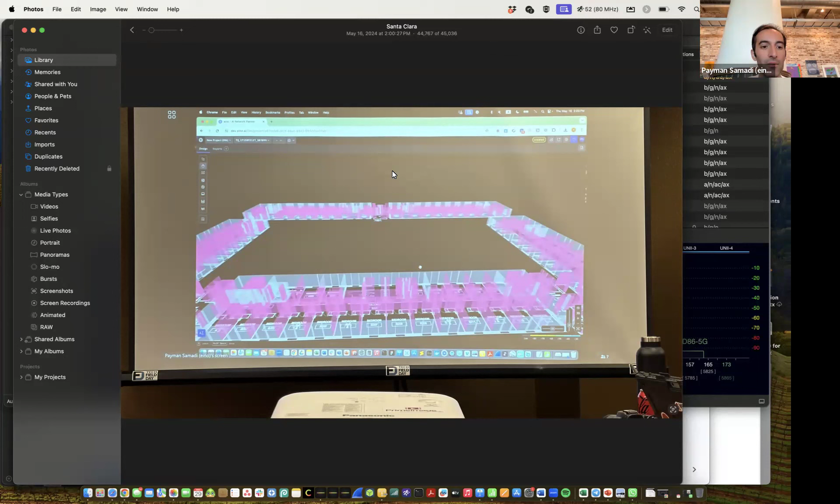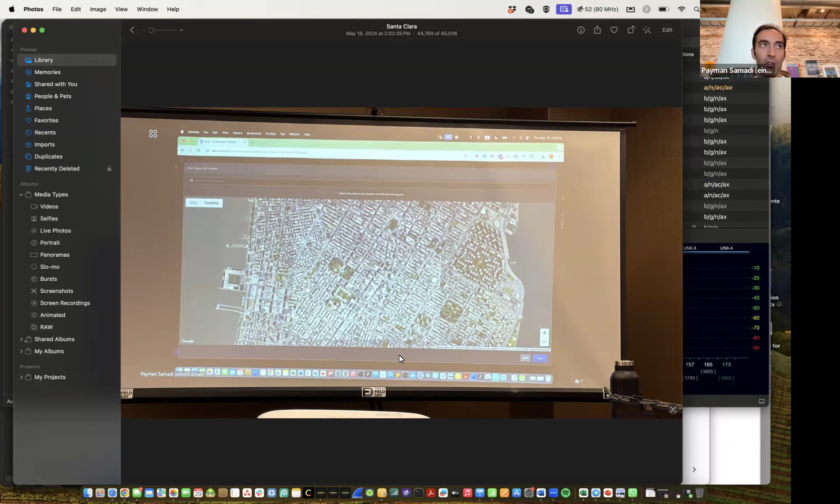So there are tools in the market that have been around for many years, and they're all great tools because there are thousands and thousands of networks built using them. But there are some differences. When we look at iBwave, it's a very sophisticated tool that requires deep expertise to use, and it's mainly built for carrier-level design of cellular networks. But once we come to private cellular networks, it's a different concept — the cost structure is different, the number of radios you put is different, the way you design the network is different. So there are different requirements that we thought we could put into our platform.

In terms of Wi-Fi design as well, we realized there are ways to introduce automation and create a recommendation engine that helps people save time, providing a rough order of magnitude as your very first initial design when you haven't won the project yet and don't want to spend much money. You can very fast create that rough order of magnitude, then tune and do detailed design, avoiding much of the manual work, and go all the way to the validation side. So I think that's how we are different — we try to build the product to fit private cellular and Wi-Fi, making things faster and easier for people. And faster and easier is what we all need.

And I think now, with the presence of more players in the field of Wi-Fi design, this comes at a perfect timing, because there are a lot of organizations out there that are either not renewing services with existing providers, or they're just new to it and want to explore all the different options available.

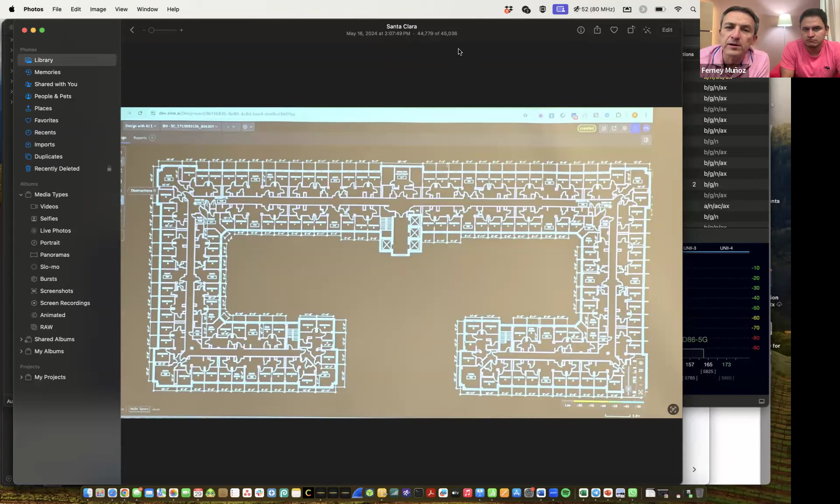Do you have a chance to share your screen and show us how the tool works a little bit? Let me just stop sharing my still boring pictures that aren't very clear, and then I'll let you show your product so our audience can see for themselves.

So we are a web-based platform, so you're able to basically design on web. You don't need to install, and that provides a couple of things: you're able to easily log in anywhere that you are. You're also able to basically share and work on projects together on the different phases and make sure that everything's online. So that makes this process much easier.

But I'll go through the process of creating the project. So when you create a new project, you could create an indoor project, you could create an outdoor project, and you could create a project through your own clutter data, so the terrain data and the DSM data that you have. I'll show you an example of how you could create a project in each of these workflows, and feel free to stop me, ask questions, if anyone comes.

Oh, I will, I will. So, we're good at doing that, interrupting whoever's presenting.

Certainly. So on the outdoor project, the most important thing is about the environment that you're building the network. Anywhere that you build a network, the most important thing is where you build the network, and having correct and accurate information about that area makes a big difference. And whether it's indoor or outdoor, you kind of need to create that scene.

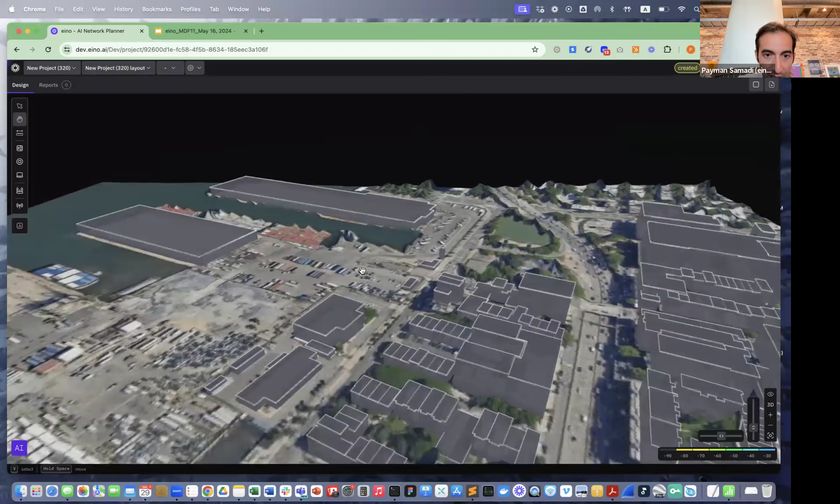So you see in these areas that I defined, we have these buildings, and they have different heights there. If you kind of go further, you see that there's different heights for trees here. So it has recognized and created that surface for these trees in different locations.

Can you modify some of this or add your own? Yes, you're able to modify. So this is the building - the assumption is that there's a concrete wall there and it has a specific thickness, a specific height, but you're able to change that and basically say, okay, this is not 35, this is 10 centimeters.

And boom, it's done. Or for example, you come here and say, oh, I have a lot of containers here that I did not basically put there. What if I go and draw one of those there and say this is a metal container, it's 2 millimeters thick, that's usually what it is, and it's 6 meters high.

I can draw this here, and easily select it, copy, paste it, and add it to different locations. I can multi-select and copy, doing all these manipulations on these files and modify it the way I want. That's the first phase that helps create those environments much faster, if it's outdoor.

And if it's an indoor setup, you're able to go and... wait, before you move away from that, can we go back to that one? Sure, sure.

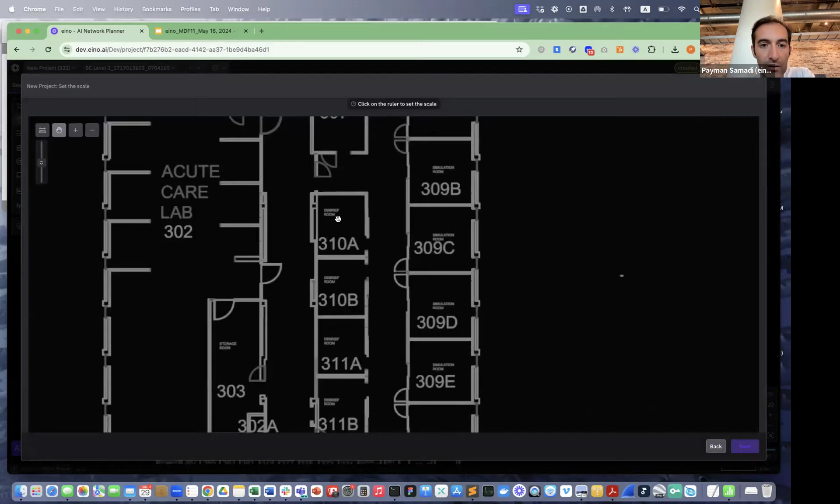For example, this is the PDF file that I've uploaded there. And two things that we ask you to do when you upload the layout to help in the automation side. One side of it is basically setting the scale of the project. Usually there's some sort of information of the scale. Here, there's nothing there, but I could just look at the wall and understand that, okay, my wall's 1 meter on this project. I've measured it and I know what it is. And then the second side, we basically ask you to tell us where you want to build this network.

And based on that, our calculations in terms of calculating the coverage area, but also doing some of the automation and AI work, basically helps out here. Once you have a more clear area, you can definitely change it later on. But the first step is you have this kind of project layout uploaded on the platform here. And generally, you need to either find the layers and, based on that, put your walls there or draw the walls. We have different wall types and materials you're able to put there.

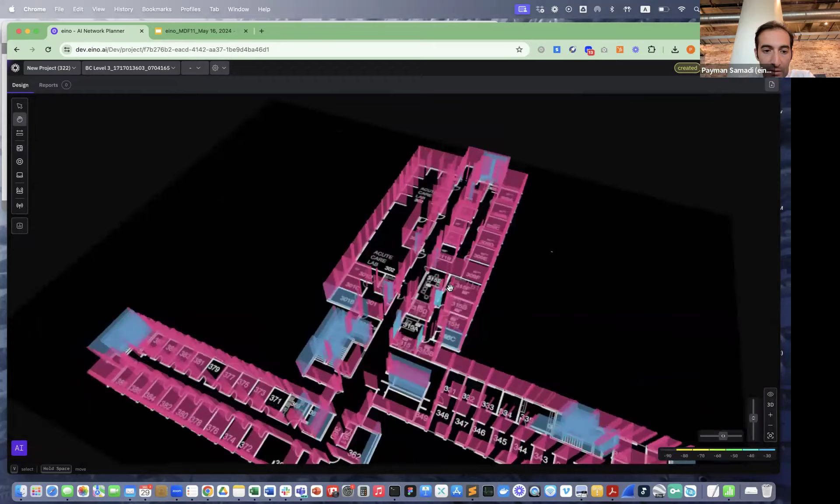But one thing we have implemented is this generate walls feature that analyzes this image, and based on how it's been drawn and how it looks, tries to automate that process and basically finds those walls and everything for you. So if I go to 3D, it has been able to recognize all the locations of the walls there, and the color coding is generally for the material used, and says, okay, these are the walls I found. This is the thickness of my walls, this is their material, and this is the height of my walls. So you kind of have your thing there.

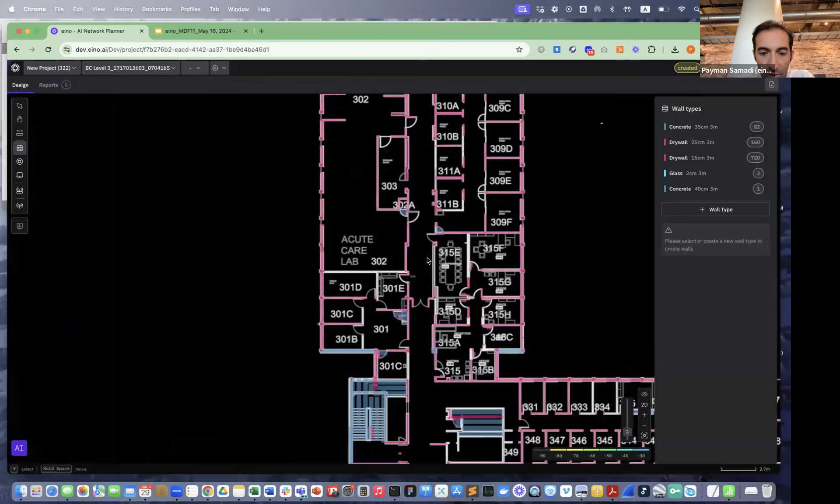It might not be 100% accurate. For example, here it has recognized these stairs as walls, but you could basically just select and delete them and get these fixed. But it saves you a lot of time, especially at the start, when you want to just get your initial rough order of magnitude.

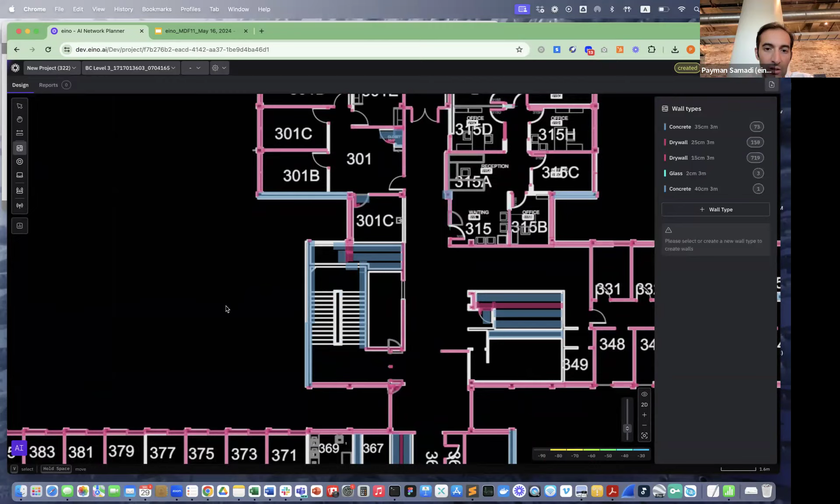You could say, you just have to go and shape it and get rid of little things or add little things that were missed. Exactly. And this is basically a model that's training, it's a learning model. So as we receive new layouts, we retrain and it becomes better and better as you go.

So this is like a non-layered PDF. It's just a flat PDF. That's basically an image, yeah. And it was able to do a pretty good job. It was a vector PDF, but no layering in it. It was just flat in that sense.

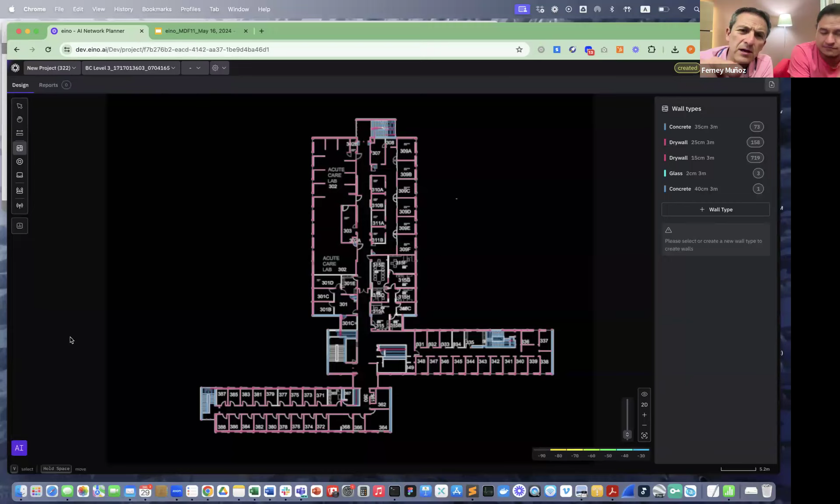And I'm glad to see that, like, if you zoom in on the text, it says acute care lab. I'm glad that none of those letters were detected as walls and simulated there. Yeah, usually that happens, but we train the model to make sure these things are not happening, and we do those correctly. Because that's happened many times, so we learn.

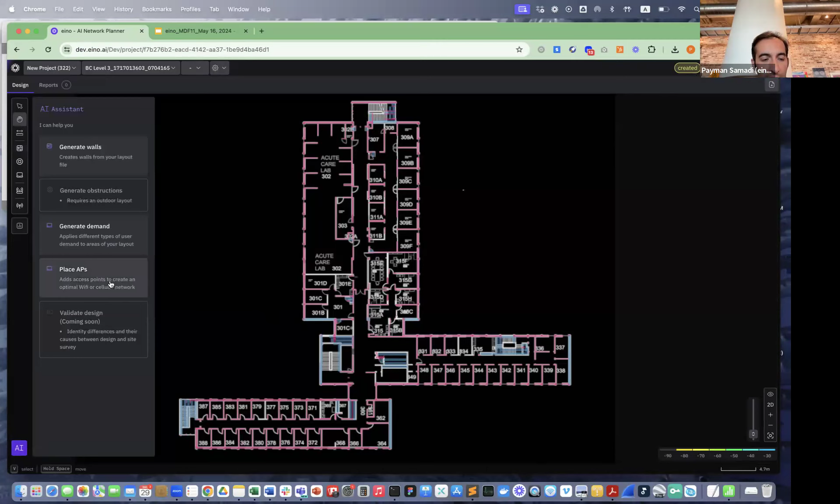So you go and clean up these areas, and then generally the first step of the design is to make sure there's enough coverage everywhere, and what's the number of APs we require here? And we have this thing called Place AP, and you're able to say, okay, I want to design with this AP, and I want to make sure at 5 gigahertz I have minimum minus 70, and that's my design criteria.

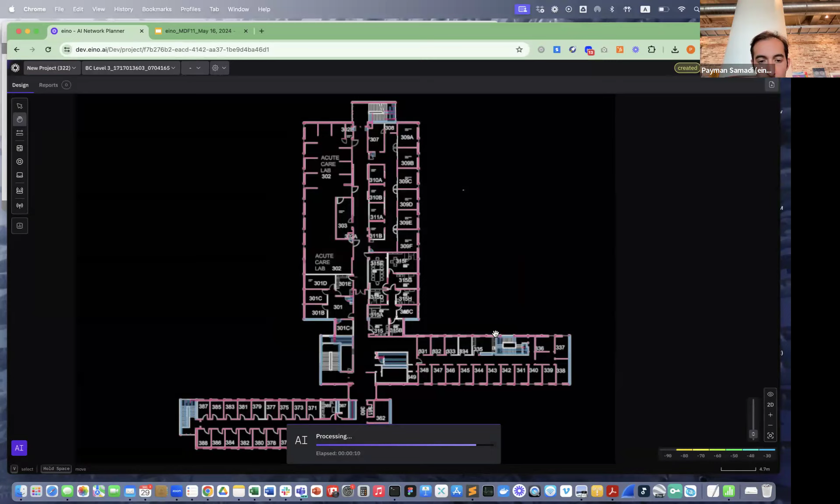And tell me how many APs I need, and what would be the best places to put my APs. So this optimization algorithm goes through your environment and understands the different types of walls, how signal propagates through them, and based on that, how many APs I need, where I need to put them, and what my heat map looks like. So that's kind of a general design that it gave you.

And we automatically generate the statistics, that you need about 22 APs here, and this is your bill of material. I can probably see some guys here cringing because it looks like it placed them all in the corridors, which we've had this argument before, like in hotels.

Like we are in a hotel in Valencia right now, and the APs are in the hallways, and hopefully I don't jinx it, but we're lucky we have good connectivity now because earlier today we were kind of experiencing that. Yes.

So, of course, I'm not saying that it's wrong. It's doing the best it can. And now the humans will come with the knowledge we have from real-life experience and perhaps modify this. As we relocate APs or manually add APs, is that also training the software to follow those patterns? Or how would that benefit the software? That's a great point. Yes.

There are many details in the design of the Wi-Fi that need to be considered. This is just the general side, but yes, do I put it in corridors? I cannot put it in corridors. I have to put it in rooms. I cannot put it in the rooms. My power levels, all these details. So on one side, we are getting a lot of feedback on these features, and we are making changes so you could say, these are the different types of areas I have, I want to make sure no AP goes to the corridor.

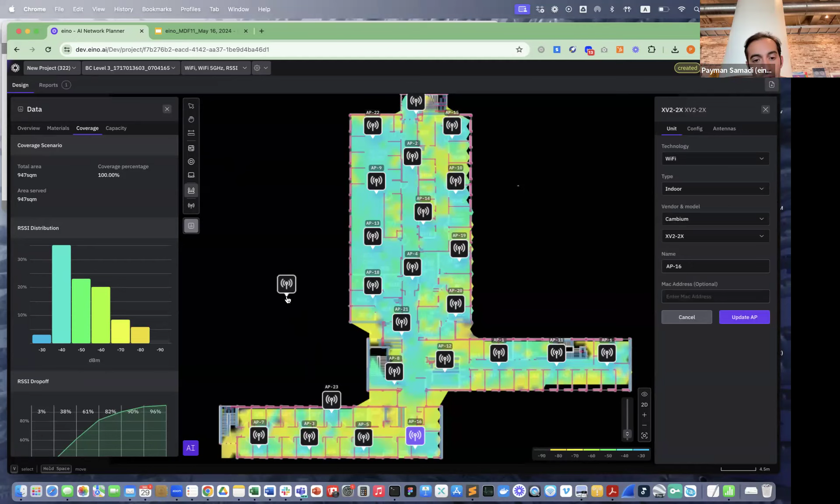Can you just look at the coverage of one AP if you select one? Yeah, that's something we're adding by the end of the week. We realize it's very important for you guys to do that. Yes, that's something you're adding. And then, as you said, you could just go and say, okay, now I need to add one here. So now I'm good there. And I could see my stats are improved. Okay, perfect. Wow, pretty exciting for all those out there designing Wi-Fi.

Now, part of the design sometimes is going on site and measuring and double checking and corroborating losses and attenuation and stuff. Do you have a device that you use to go on site and measure, or to validate and compare the simulation versus the actual measurements on site? Sure. So it's a bit different for indoor and outdoor.

For outdoor, we have created a standard schema so that you're able to export site survey data if it has any sort of lat-long information. So if you go and collect with any device that has lat-long and you're able to export, you can export that data and see it on our platform. And I'll show you one example here. I think this is an example, I might be wrong. This is not an example.

Yeah, and show it there. But if you're doing an indoor project, we don't have it yet, because indoor you need to have specific X and Y to be able to show it there. But we are talking to some partners to be able to work with them and provide that connectivity, so you could use some of the devices that you use, and then using those, you'd be able to import the data back and compare. Okay, perfect.

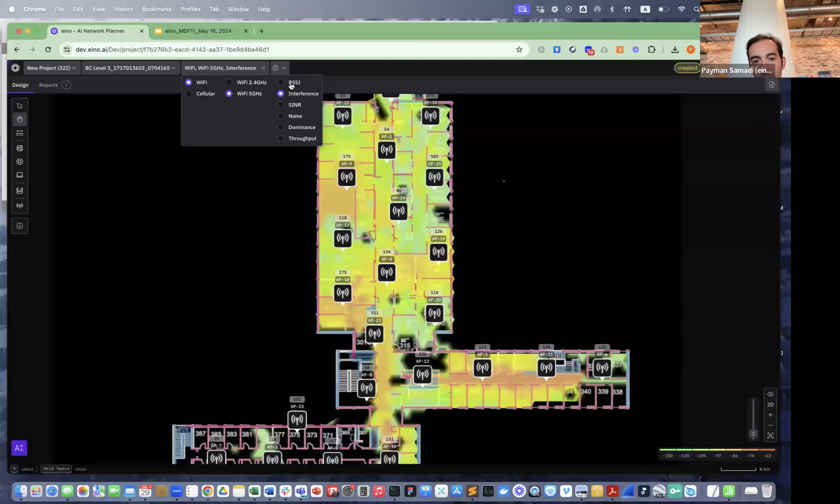And maybe a quick note at the end. I know in Wi-Fi, the most important thing is the channel assignment and interference that you get from the channels. So we do have an automated channel assignment where you're able to see all the channels assigned at different frequencies, and you're able to see the interference that happens there and compare and change and understand how it's working, your SINR and all that information there as well.

I'm seeing in your presentation, you're not including 6 gigahertz. Are you planning to add it? Sorry, what was the question? He was asking about 6 gigahertz. Yeah. The AP that was chosen here only supports 2.4 and 5. That's why it was restricted. But when you select an AP, if it's 6 gigahertz compatible, then that shows up as an option and you can see the coverage at 6 gigahertz. And all of the back end ray tracing calculations, the attenuations and the materials account for the differences in frequency. Okay. So this model specifically, this Cambium 23T, has 6 gigahertz, so it shows up there as well.

Okay. If you did a design with one model, can you swap all the APs in their locations to a different model and reapply everything? Yes, you could go here and basically apply that, and it changes the AP, and it shows you. I could go to RSSI, and then you're able to see everything there changed, and the difference between them, and you could change.

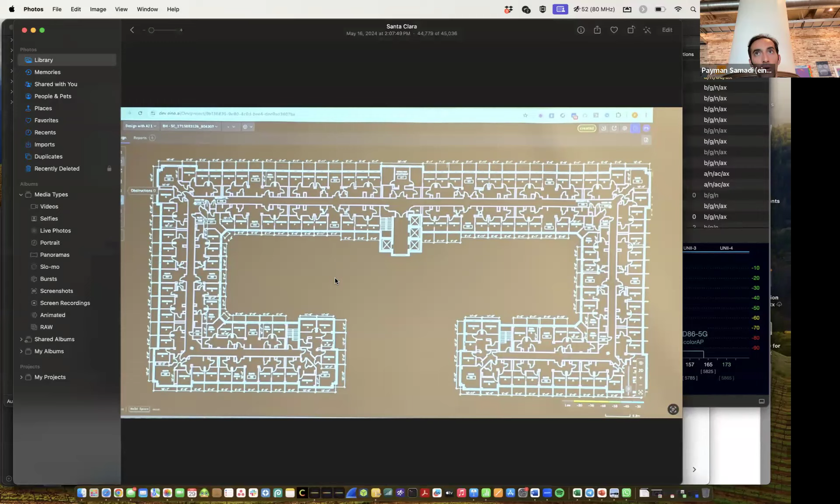So our goal is being able to help you to be more efficient and more confident as the new technology comes in, to be able to design the network in the best possible way and reduce the cost and the time that it takes you to get there.

I'm sorry, I'm from Mexico, but I was late. I tried to be here as early as possible. But is this a project or is it already a product you are selling? I'm sorry, I was late. Oh, you're good, no need to apologize, man. Thanks for coming. Is it a project? Okay. Yes, it's a product. It's a software product that we provide for solution architects and network designers to be able to use in designing their wireless networks.

Okay, and do you have a licensing model already, or are you working on that? Yes, and that's one thing I would like to actually emphasize. Our model is different. Generally, when you sell any sort of enterprise software, it's based on the number of seats. You buy an annual seat per user, but we have redesigned the model on a project basis. So you're able to get a monthly membership, and based on that, you get credits and use those credits for your projects. In that sense, you're able to scale based on the number of projects you get every month. If you just get one project a month, you use that one credit. If you want to do 2, 3, 4, you are able to add.